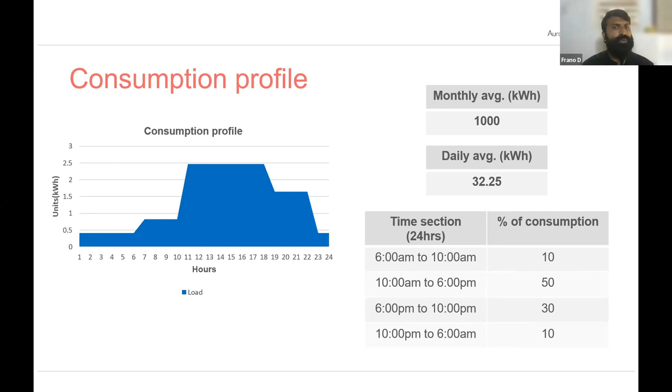Now that we have realized this is the way we could recreate our electricity consumption profile using the web tool, we would also like to know how this consumption profile would change when a solar system has been introduced in the location.

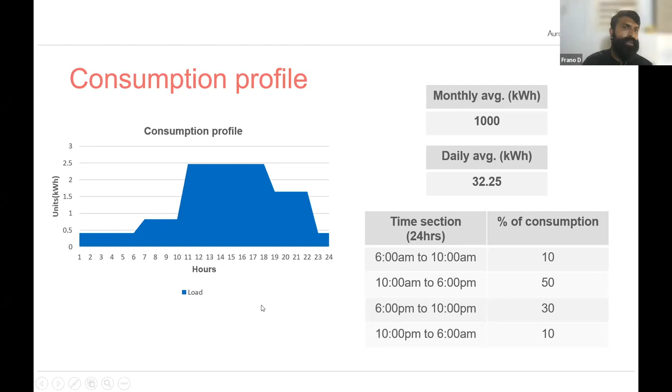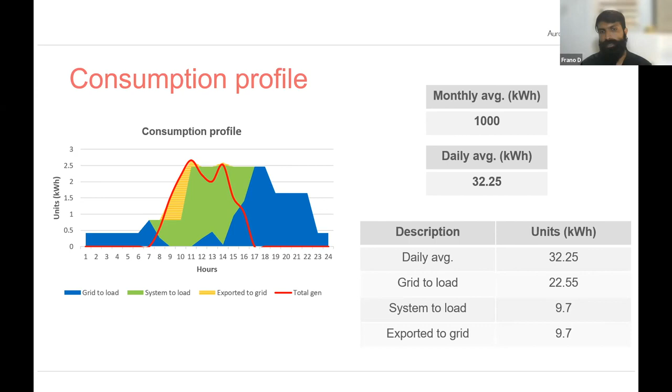Moving further to how we account for this energy, we will launch a poll and would like you to answer it to understand better how we consider the definitions of feed-in mechanisms. The question is: does net in net feed-in stand for net unit, that is kilowatt hour consumption, or net amount, that is rupees payable at the end of the billing cycle? Please indicate which option you think is relevant to the net feed-in mechanism applicable also in Tamil Nadu.

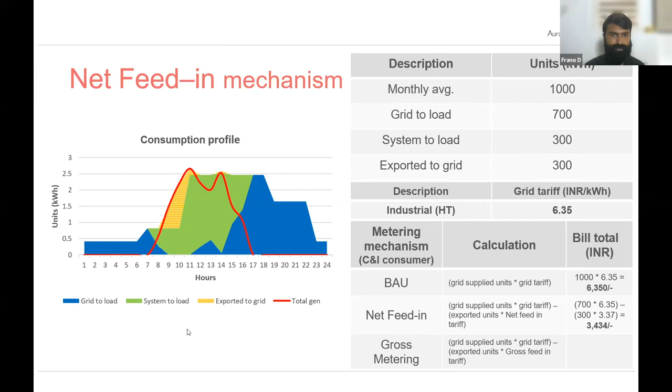As you can see, we have taken the industrial grid tariff with the same system, but there is no contribution from the solar system to satisfy your electricity consumption in case of gross metering, because all the energy generated by the solar system is exported directly to grid, and you are paid for those exported units at the gross feed-in tariff applicable for your category under the voltage type for the consumer.

In the gross metering calculation, the total grid supplied units, that is the 1000 units required, is multiplied by the grid tariff. Further, the total solar generation from your installed system is multiplied with the gross feed-in tariff for that consumer, and the difference is payable at the end of the billing cycle.

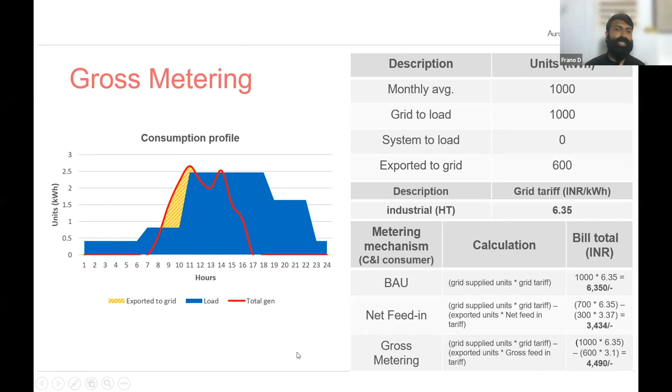Initially, while talking about regulations and policies, Radhika also mentioned an introduction of network charges. We would briefly talk about what network charges are and how they impact our energy accounting in the next couple of slides.

To explain network charges briefly, these are grid support charges paid by the user to the distribution licensee for connection to the grid. Network charges include the total generation of solar energy, that is both the self-consumption part as well as the part exported to the grid.

Network charge is applicable only for the net metering and net feed-in mechanisms. As seen from the table, for C&I consumers under different voltage types, we have the network charges for varying metering mechanisms such as net feed-in and gross metering. There is no network charge applicable for the gross metering mechanism. You can see the different network charges applicable for the LT consumer as well as the HT consumer under commercial and industrial consumer tariff.

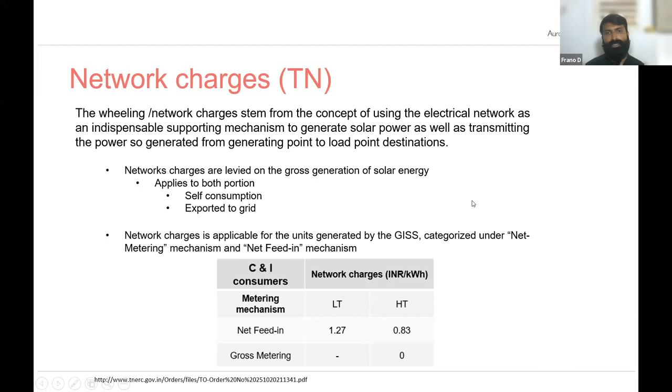So, taking network charge into consideration, we apply this to the energy accounting after installation of a solar system and do our calculation for net feed-in and gross metering again. If you notice, we have added the total solar generation and multiplied it with the applicable network charge for that particular consumer, and calculated the new bill to be paid at the end of the billing cycle by this consumer.

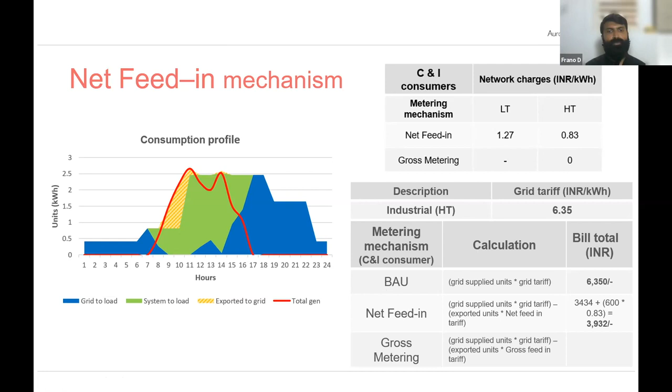Similarly, for the gross metering mechanism, we don't have any network charge, hence 0 rupees per unit has been applied in case of gross metering, and the bill amount remains the same in case of gross metering.

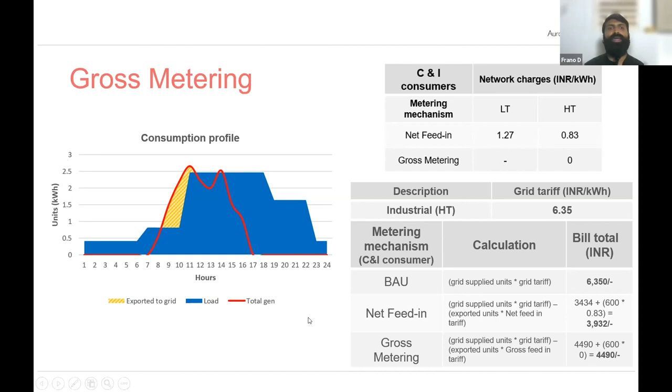Once we have realized the energy accounting and how to account for our consumption of electricity after the installation of a solar system, we move to see how we have tried to optimize the results in the Solsavi web tool.

For optimization criteria, we were looking to maximize our avoided cost, maximize the savings possible from the installed solar system, and also minimize the payback for the solar system installed. Some important parameters to consider were the self-consumption from this installed system, how much we could export to the grid, and how much we are importing from the grid to satisfy the electricity demand at our connection.

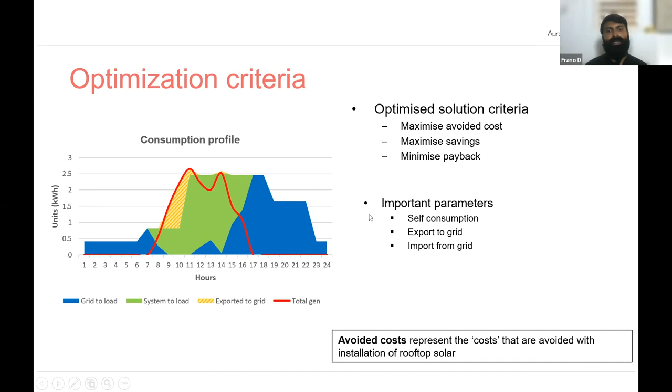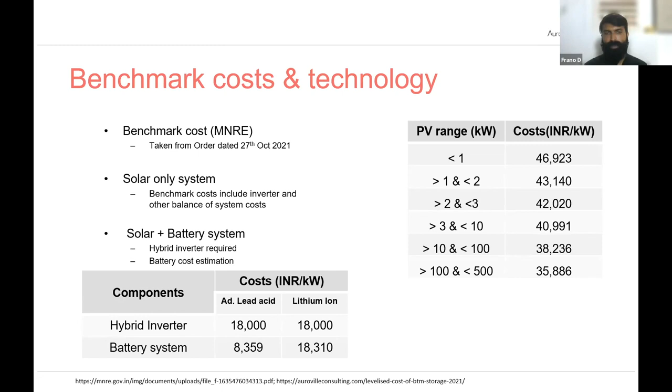So now that we have learned the various metering mechanisms applicable in Tamil Nadu for C&I consumers, we have also seen how installation of a solar system could take a certain portion of the load or consumption profile of the user, and how to do the energy accounting of your connection after the installation of rooftop solar.

Here, before moving further, we would like to pose a question to the participants on what are your motivations for installing rooftop solar. We would ask this question in the form of a poll, where we would like you to answer whether your motivations are financially based, based on some legal requirements, or have environmental benefits that appeal to you for the installation of rooftop solar.

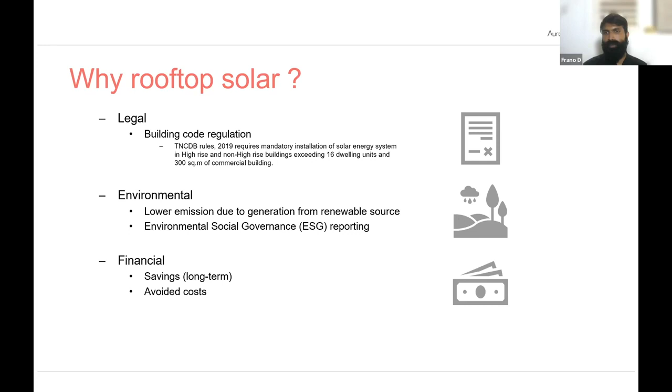Once we have assessed that we need the rooftop solar system, the decision-making process would begin with the conception of the idea or the project, to check the feasibility of the project, to do a design and planning for the implementation or installation of the system, and finally operate and maintain the system over its lifetime period.

During the feasibility project, we would require an alternate opinion, a detailed generation pattern from the system to make an accurate estimation of the system size. We could also get an estimation from the potential savings and the investment required for that solar system. And we need to do this fairly quickly.

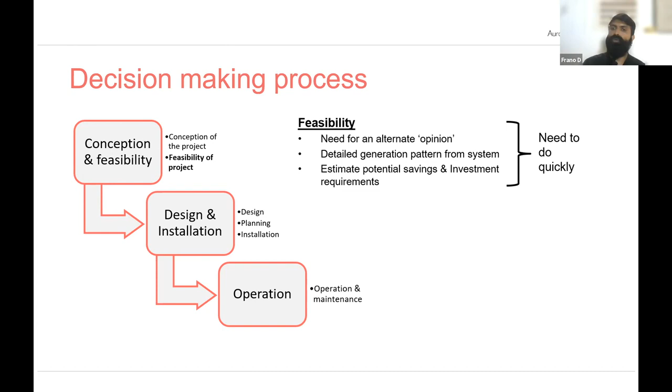So to do this quickly, we introduce the tool Solsavi. The tool would be updated with the tariffs, the latest policy regulations, as well as supports the analysis, which includes battery storage, provides a 25-year analysis and a financial analysis for the selected system, provides outputs in terms of return on investment, payback years, and potential savings.

We also have an option in the web tool to either optimize depending on the inputs provided by the user, or customize depending on the desired capacity that the user wants to install at the location.

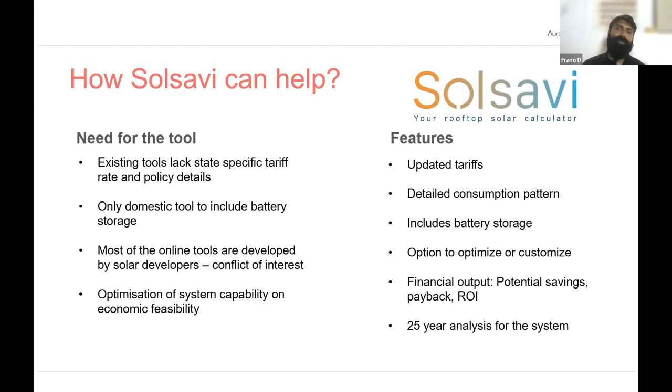To get familiar with the Solsavi web tool, we have designed two demo scenarios. The first scenario would be for a commercial building and HT category, while the second scenario would be for an industrial warehouse and LT category.

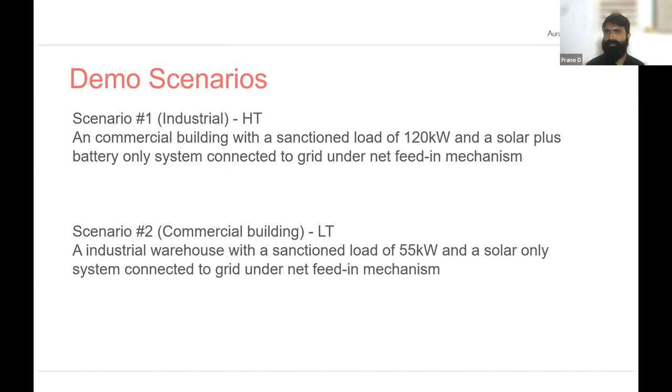The first simulation I would carry out in detail, and I would explain the process of simulating it in the Solsavi web tool and explain the results initially. While the demo scenario 2, we could do it together simultaneously with all the participants and try and achieve the results while using the tool.

So to further proceed and simulate this in Solsavi, I will stop sharing my screen now and shift to the web browser and share the web browser screen. I hope the screen is visible on your side.

So this is the landing page for the Solsavi website. We will share the link of this website on the chat, so it's easier for you to access the website in case you would like to access the website during the presentation.

We have a few details about the website which tell us that this web tool helps us to determine the capacity, to calculate our savings, and to reduce our emissions. We also have a brief video to explain what we are looking to achieve from this web tool, and we do have a contact message button where the user could get in touch with the organizers or the people who can receive and manage the Solsavi site, along with some initial critical links for the Auroville Consulting organization.

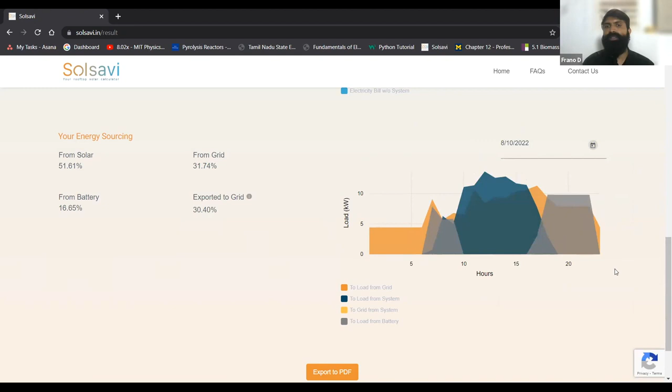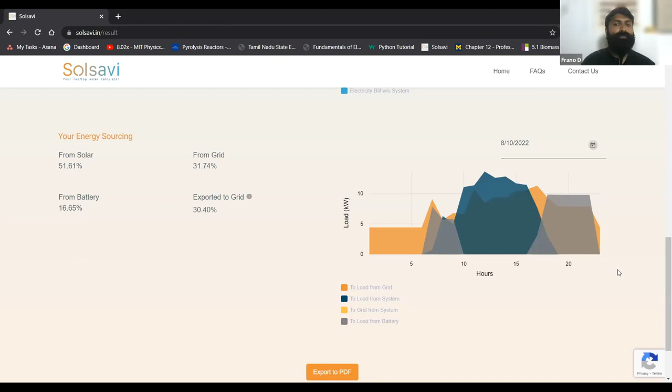You can see that this consumption pattern or the generation from solar and contribution to load has been provided for today's day, and we could select any particular day in the year and it would give us a load profile for that particular day in that particular year. Hence, we could have an analysis of almost 1 year of how our solar system could behave and what changes could be estimated with the weather data.

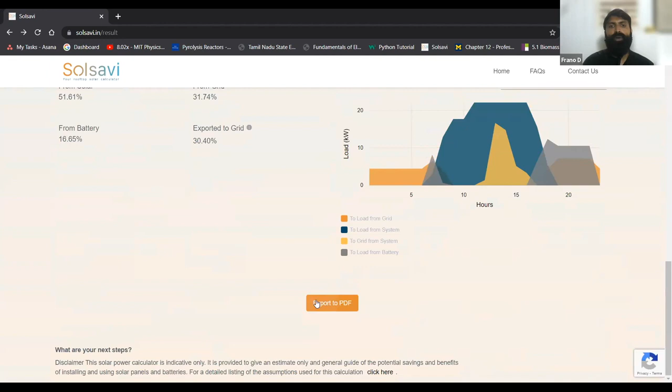We also have the provision for you to check the assumptions at the end of the page, where we share what assumptions we have taken into consideration during our simulation of these results. Finally, you could also download by clicking the export to PDF button, and the detailed report then gets saved on your computer at the location you have chosen.

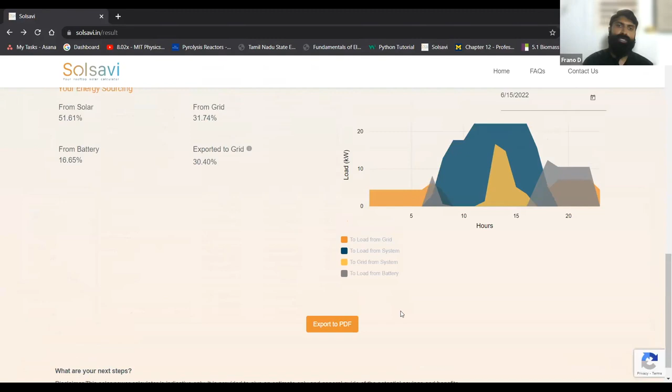To be able to simulate the second scenario, I will stop, return to the slides, show you the second scenario, and come back and try and simulate together this time. We will try to do it so that all of them can follow the instructions and simulate it on your own laptop or PC.

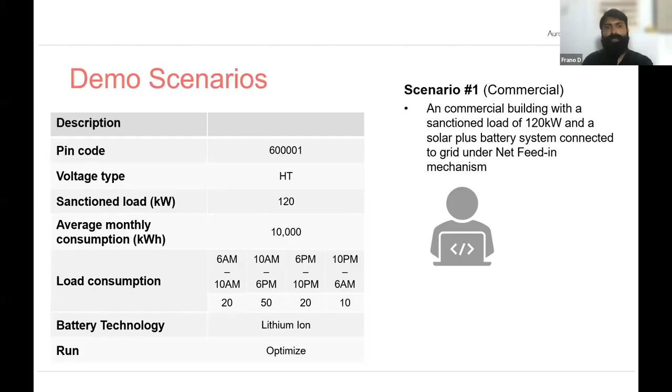Moving to the second scenario, we would share the link in the chat box so that you could find it easier to just click on the link and access the website, or else you could also find this tool under the Auroville Consulting website and under tools and under Solsavi. So you could save this as bookmark and use it at a later period of time. But please click the link shared in the chat so that it will be easier for you to access the site during this webinar.

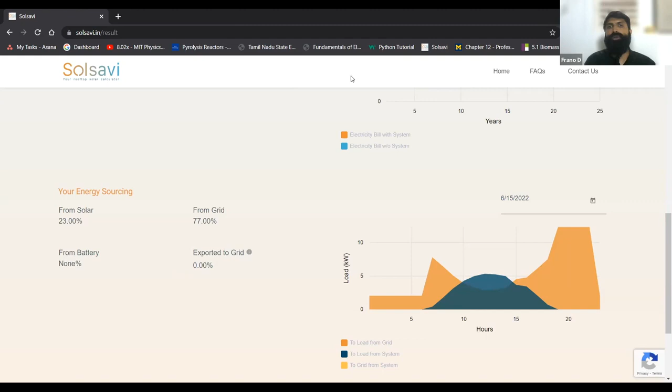We also have the energy sourcing for this particular system as seen, where 23% of the load is satisfied by solar system installed and 77% is from the grid. This system does not give any export energy to the grid, nor uses battery as we have selected only solar only case for our simulation.

You could download the results by clicking export to PDF button and download a 2-page result summary as well as detailed report for your further analysis.

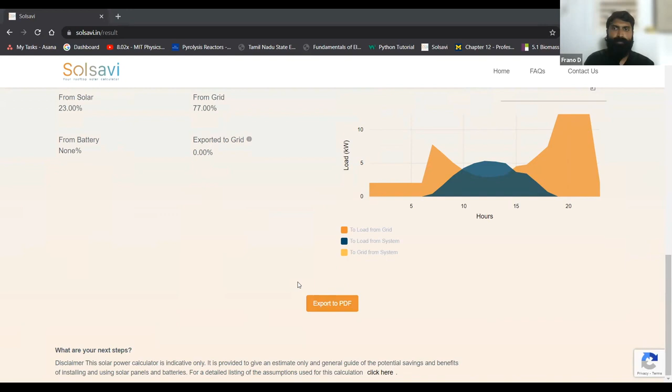To be able to further modify or change your results, you could make use of the button called 'revise calculation' on the summary page of your results. This would take you back to the demographic page where you could further modify and change any selection that has happened, or come to the customized page and provide a different input to see how your system varies with a higher solar capacity, and download the results to use for comparison.

I would like to stop presenting the web browser here and return back to the presentation.

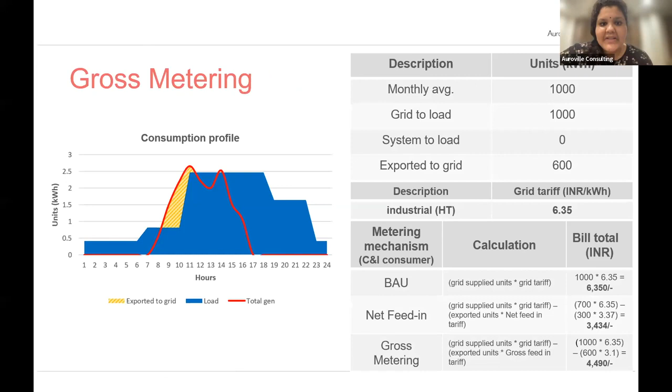Maybe I can show you this slide again where we discussed this earlier so it would be clearer to the participant. Please note that all your questions will be answered. We have a lot of questions coming in, so we will try our best to answer all your queries. Thank you for your patience.

While in net feed-in, we calculate the amount to be paid for the grid supplied units, and we calculate how much has to be paid for the export, and we take the difference of this amount. That would be the main difference between these two metering mechanisms. I hope that answers the question.

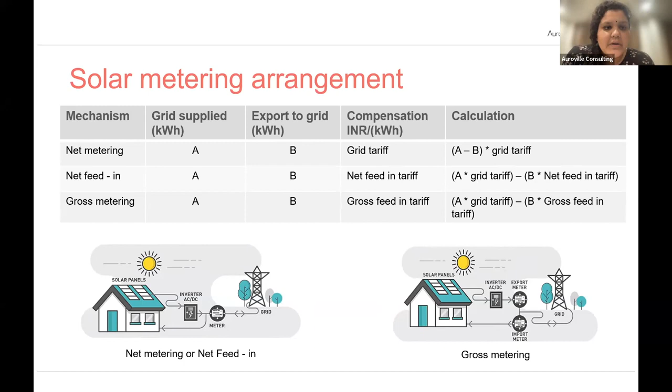We have one more question from Mr. Som Ishwarmurthy: for commercial consumers, what are the options for metering? What metering mechanisms are available for commercial consumers? Can you please go to that slide, Fran?

Yes, Radhika, would you like to take this question? Yes, I can. I would like to tell you that net feed-in is valid for all consumers, including high tension categories. Net metering is only valid for domestic consumers. So only domestic consumers have the option of choosing between net metering and net feed-in.

And gross metering is only valid for high tension consumers with system sizes larger than 150 kilowatts. So to answer your question, for commercial consumers, ideally only net feed-in would be valid as a metering mechanism.

Hello, yes. Madam, I'm Sivakumar. In the existing policy, for HT connections, is there no option to export any units? In the current policy, for HT connections, can we export?

Yes, if you have an HT connection with system size larger than 150 kilowatts, HT consumers can export. Yes, 300 kilowatts, madam. HT connection 300 kilowatts, yes. So if there are any excess units in net feed systems, can we export, ma'am?